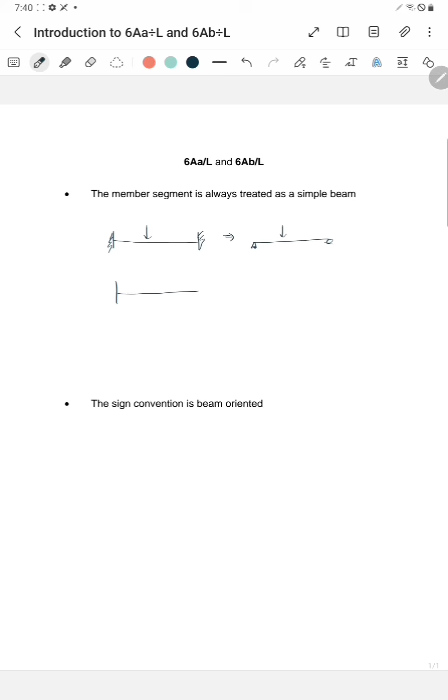So una, the member segment is always treated as a simple beam. So halimbawa ang beam is a fixed beam subjected to a load. Then iti-treat natin siya or i-convert natin siya into equivalent simple beam subjected to the same load. Kung ang beam ay cantilever, then convert natin siya into equivalent simple beam subjected to the same load.

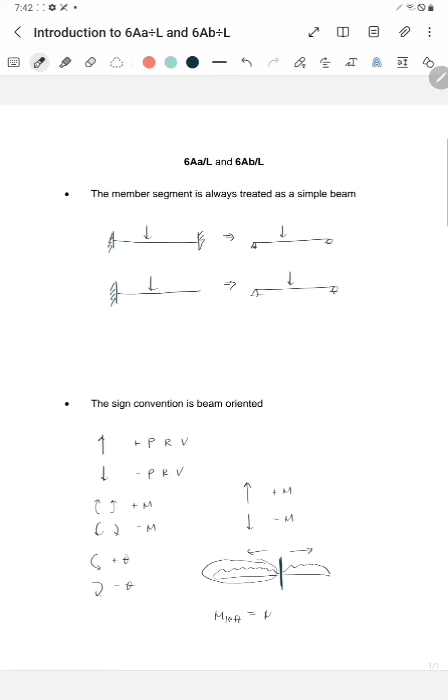Isa pa sa property ng beam oriented ay, say meron tayong beam segment at meron tayong cutting plane. So nahati yung beam segment into two parts. So meron tayong left part and right part, both subjected sa load. So property ng beam oriented, moment at the left of the cutting plane due to the loads is always equal to the moment at the right of the cutting plane. Moment left is always equal to moment right.

Mag-solve tayo ng mga examples. Example number 1, beam subjected to a single concentrated load. So meron tayong mga steps in solving for the parameter 6AA over L and 6AB over L. So step 1 is solve for the reactions. Let's assume that the reactions at the supports are both upward. Then to solve for the reaction at A, we take moment at B. Okay.

So at point B, applying the beam-oriented sign convention, moment left of B is equal to the moment right of B. So left of B, the forces causing the moments are the reaction at A and the load P. Since the reaction at A is upward, its moment will be positive, the reaction times the lever arm L. And due to the load P, which is downward, the effect is a downward moment, so negative. The force is P and the lever arm is B.

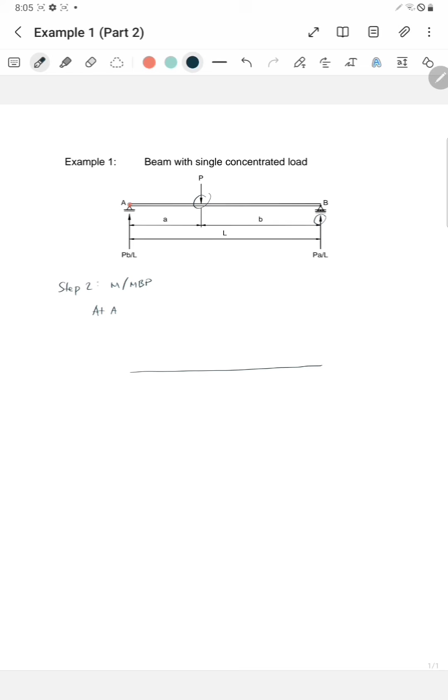Ang magko-cause ng moment at A ay dalawa, yung reaction at B and the load. Due to the reaction at B, the moment by parts diagram is triangular, starting from the point of application of the concentrated force at point B, terminating at our reference point A. The moment at A is PA over L times L, or simply PA. And due to the load P, downward, the moment by parts is triangular going down, from the point of application of P to reference point A.

And the moment is the force P times the lever arm A, negative. The next is we solve for the area. So, mayroon tayong dalawang triangles. Yung triangle sa itaas ay positive. So, the area of the positive triangle is 1/2. The base is L. The height is PA, or simply PAL over 2.

And yung area naman ng negative triangle is 1/2. The base is A. The height is PA, or simply PA square over 2. And then, para sa centroids, distance ng centroid ng positive triangle from left is 1/3 of L. And distance of the negative triangle from left is 1/3 of A. So, yan na yung ating moment by parts diagram at A.

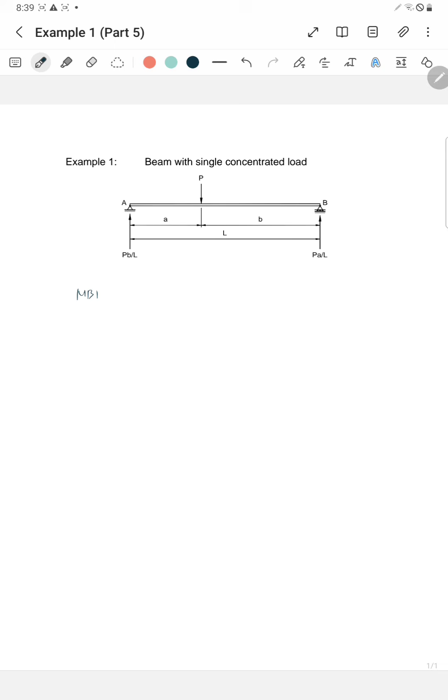So para sa parameter 6AB over L, medyo komplikado yung algebra kung ang gagamitin natin ay moment by parts at A. So ang gagawin natin ngayon ay mag-shift tayo ng moment by parts. Gagamit tayo ng ibang reference. Gawin nating reference para sa moment by parts is B. So we draw the moment by parts at B.

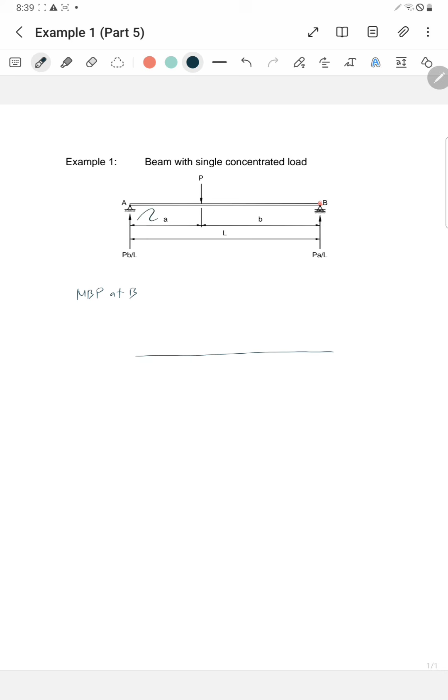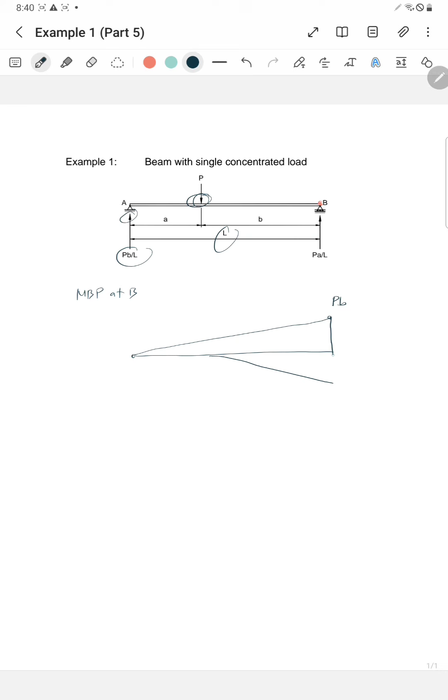So at point B, the forces causing the moments are the reaction at A and the load P. So due to the reaction at A upward, the diagram is triangular, starting from point A terminating at B, and the moment at B is PB over L times L, or simply PB. And due to this load, the moment by parts diagram is triangular downward, starting from the point of application of the load P and terminating at B, and the moment is P times B.

Then the area, the positive area is 1/2, the base is L, the height is PB, or simply PBL over 2, and itong triangle na ito ay 1/2, the base is B, the height is PB, or simply PB square over 2. And then centroids, for the positive triangle, the distance of the centroid from right is 1/3 of L, and for the negative triangle, distance of centroid from the right is 1/3 of B. So ito na yung ating moment by parts at B.

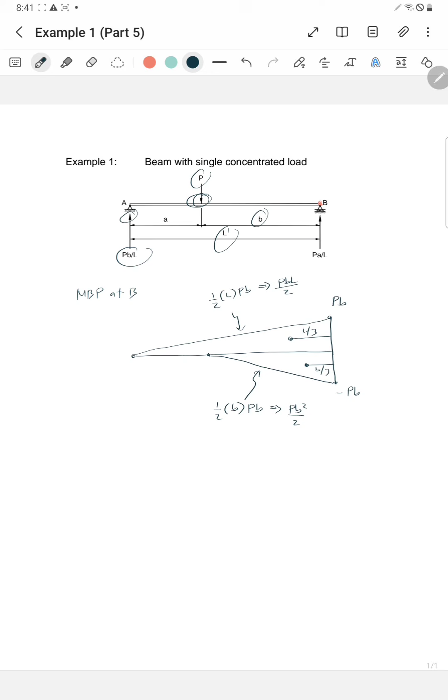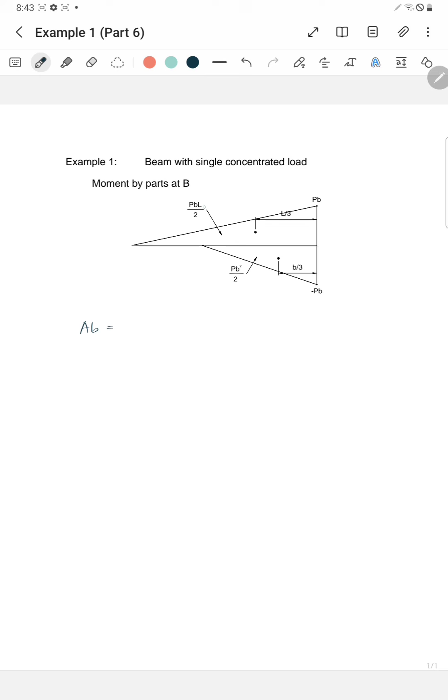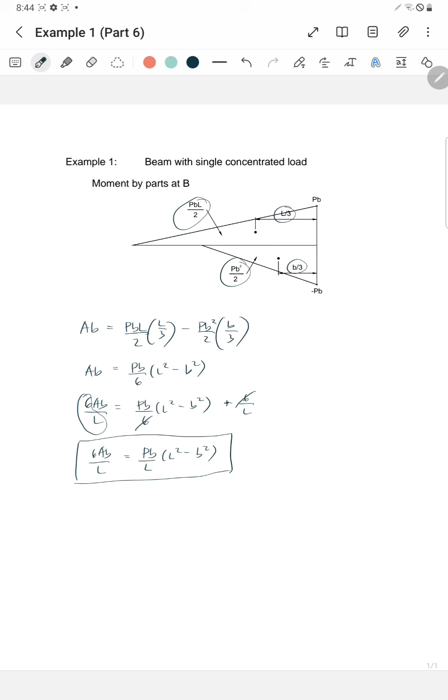Now considering moment by parts at B, we solve for the parameter AB. So the area of the positive triangle is PBL over 2, and its lever arm from right is L over 3. Then for the negative triangle, area is PB square over 2, and its lever arm from right is B over 3. So factoring out the common factors, PB over 6, then inside the parentheses are L square minus B square. Then multiplying the result by 6 over L, we obtain PB over L, L square minus B square. So ito na yung formula para sa 6AB over L ng concentrated load.